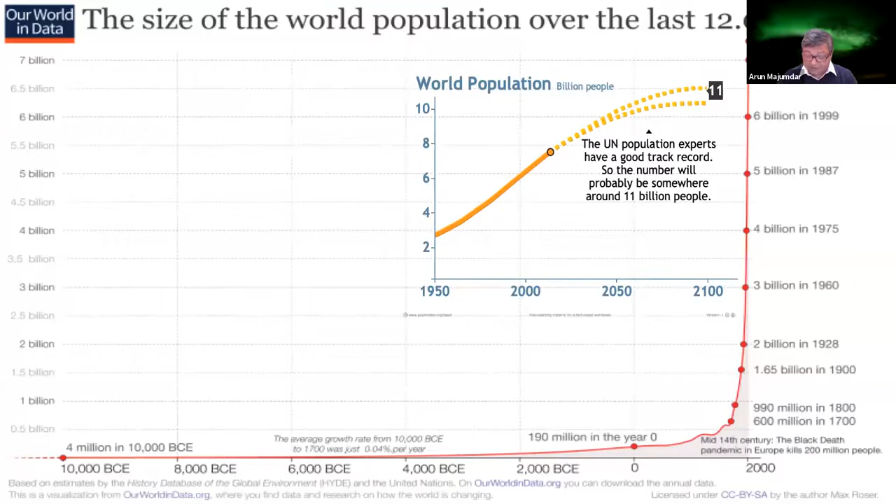And at the root of this is the use of energy. Without the energy, without the electricity that we are currently using, or the oil and gas that we have for transportation, we would not have this modern economy that we are trying to preserve at this point. And so energy is absolutely essential for economic growth and the quality of human life that we have developed, which has transformed over the last 200 years or so. People 200 years back could not have imagined the world we're living in today.

And that energy so far in history has been from fossil energy. And that today provides roughly 80% of the primary energy in the world. Renewables are a very small fraction right now. We have nuclear, hydroelectric as well, but it's mostly coal, oil, and gas. Now, the use of energy, of course, has led to this economic growth and a quality of life, but it has had other consequences as well that we are now grappling with.

Of course, we all know about global warming. This is some of the data on CO2 and the historic data on CO2. And I would say we are in unprecedented and uncharted territory right now. We are reaching almost 420 parts per million. And the global average temperature rise since the pre-industrial level is about 1 degree. Now I put a marker of 2 degrees, and that is the agreement that we had in Paris. We still have that agreement worldwide.

And the question is, why 2 degrees? That is an arbitrary number. But with 1 degree, we are now seeing the effects of climate change on the extremes of weather conditions that we are facing. And so we arbitrarily put a number saying that if you could only keep it below 2 degrees, it would be much better than 3 degrees, for example. So the question is, okay, so how long do we have? What does that really mean?

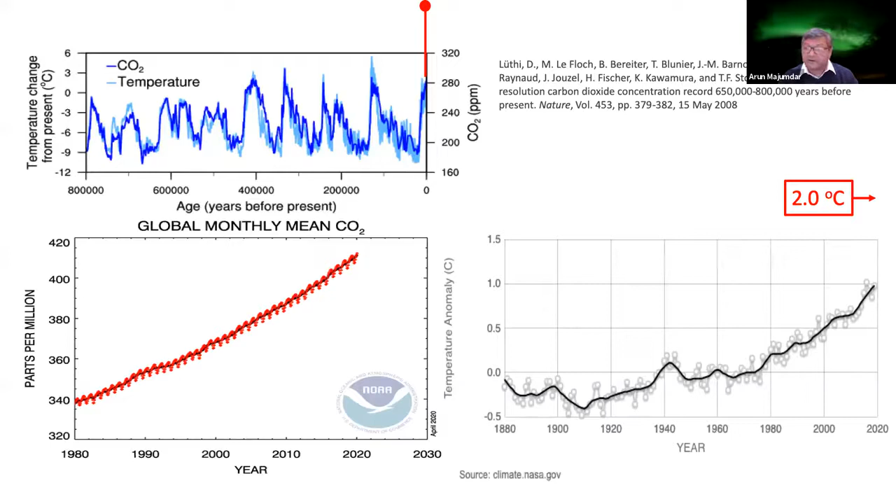So let me offer a quiz. Since I'm at a university, I offer quizzes. So here's the quiz for all of you. I'm going to throw some numbers at you, and I'd like you to think about what they mean, what are the units of the number, and what they really mean. And I'll give you the answer. There's no grading in this. The first number is 1.

And this is 1 degree Celsius. This is the global average temperature rise since the beginning of the Industrial Revolution. And with the 1 degree, we're now seeing, as I said, some of the extremes of weather conditions that we are facing around the world. The second number is 2. This is the 2 degrees Celsius according to the Paris Agreement that the world came to agree on.

The third number is 1,000. This is thankfully not 1,000 degrees Celsius, we're not talking about Venus. But if you are to keep the temperature below 2 degrees Celsius, we have headroom of a CO2 budget.

This is 1,000 gigatons of CO2, with roughly 70% probability of keeping it below 2 degrees. Just to give you a reference, if you add up the weight of all human beings on this earth, the 7.5 billion human beings, that's less than 1 gigaton. This is the headroom we have, because if you exceed 1,000 gigatons, we're going to likely exceed the 2 degrees as well.

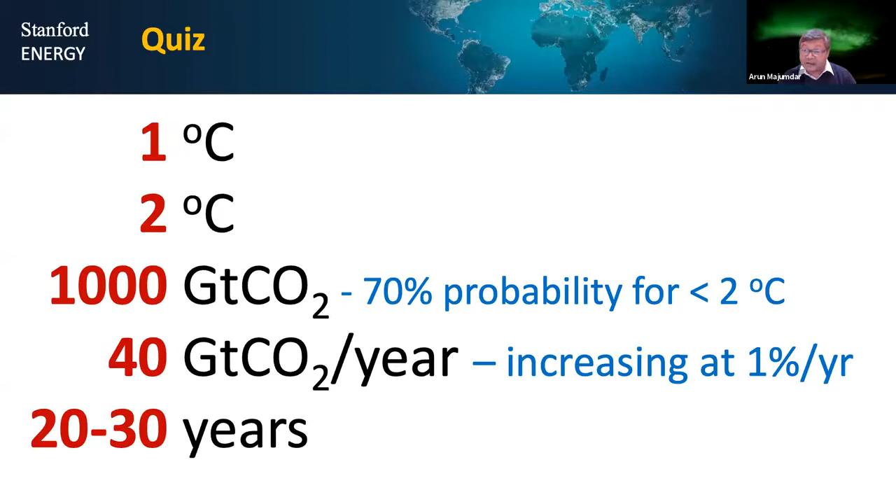Given the urgency and the magnitude and the scale of this problem, I think it is fair to say this is the defining dual challenge of the 21st century: providing access to affordable and secure energy for economic growth that we all need, but also simultaneously reducing greenhouse gas emissions. This is what we need to do, to turn the ship around to provide the energy but reduce the greenhouse gas emissions. This is a very hard problem.

Now, is there any good news in this? Are there some game changers that have happened? And indeed there are. So what are the game changers? I'm going to give you three of them. There are actually more than three, but let me offer three.

The first one is unprecedented in history: modern renewables at scale is the cheapest way to produce electricity. In fact, it's become cheaper than natural gas in North America and electricity from coal in many other countries. This is unprecedented in history, but it is intermittent, and the grid is not quite designed for that.

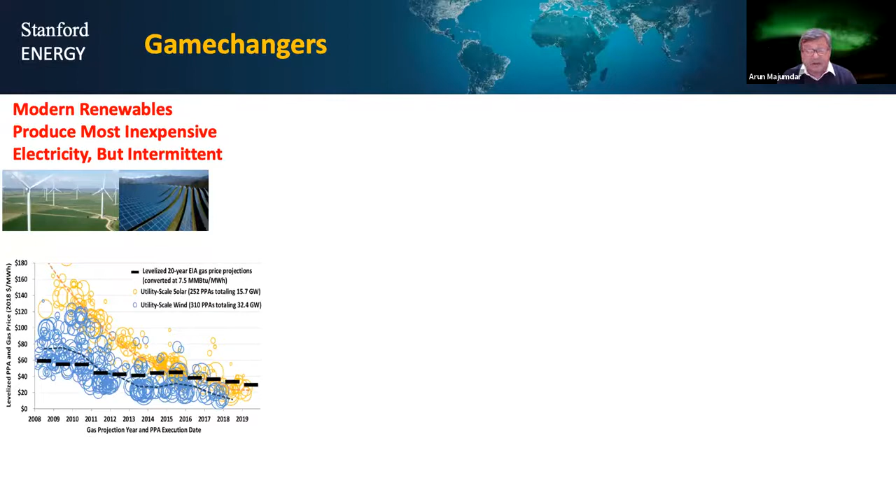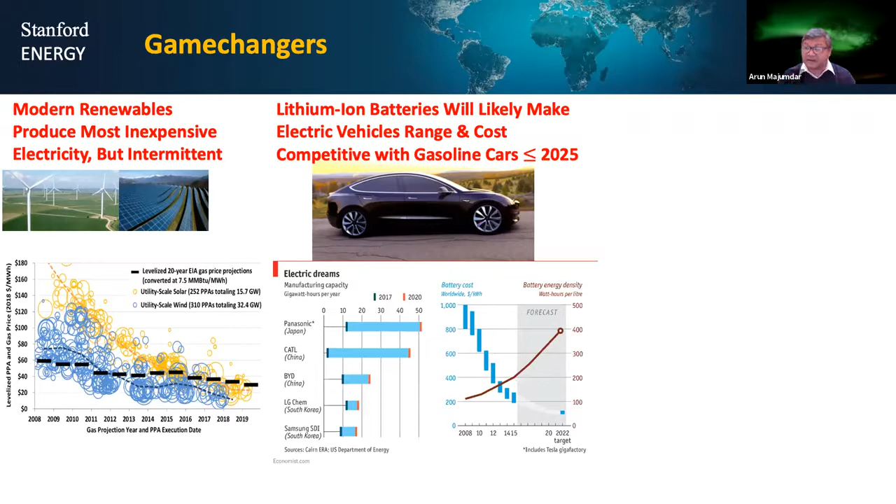The second game changer is lithium-ion batteries, and this is transforming the transportation sector. It is likely that the cost reduction in lithium-ion batteries will be such that it will make electric vehicles range and cost competitive with gasoline cars before 2025, maybe 2023. Give it another 20 years and we'll see a major adoption of electric vehicles. This is transformational, a once-in-a-century event that is happening and taking place.

The third is the unconventional gas revolution, which has provided inexpensive and abundant gas, replacing coal, especially in North America, and hopefully with some exports to other parts of the world as well. So this is the game changer, this is the good news. But you have to realize that this is a small fraction, the renewables are still a small fraction, but it's growing very fast.

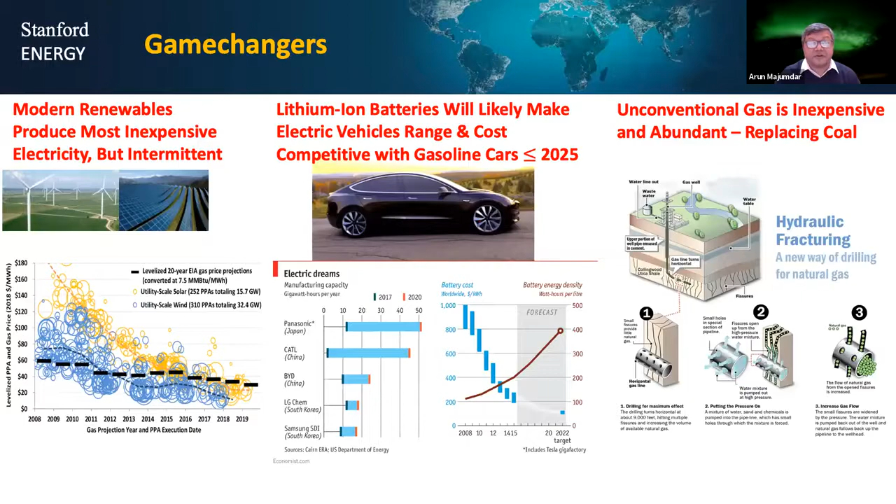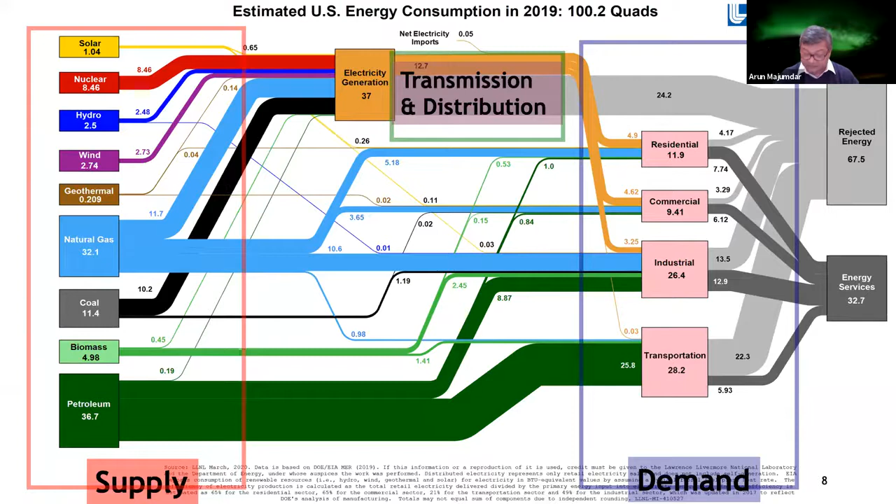And what we find, with all this growth taking place in renewables, which is really positive, is that if you do the accounting, about 90% of the current energy budget centers around heat: the conversion of heat, transmission, storage, and use.

So given the challenges of addressing energy and climate simultaneously, and given the predominance of heat energy, it is hard to think of addressing the dual challenge without addressing heat. And so this talk is really to focus on that one, and we can come back to other subjects later on.

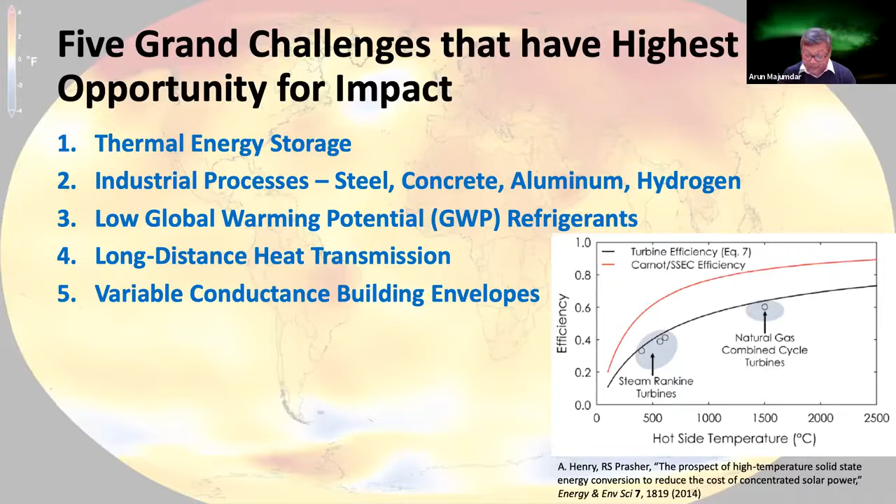So let me start with thermal energy storage. Given the renewables penetration onto the grid, it was never designed for fluctuating, intermittent renewables. We're already seeing the effects of that today.

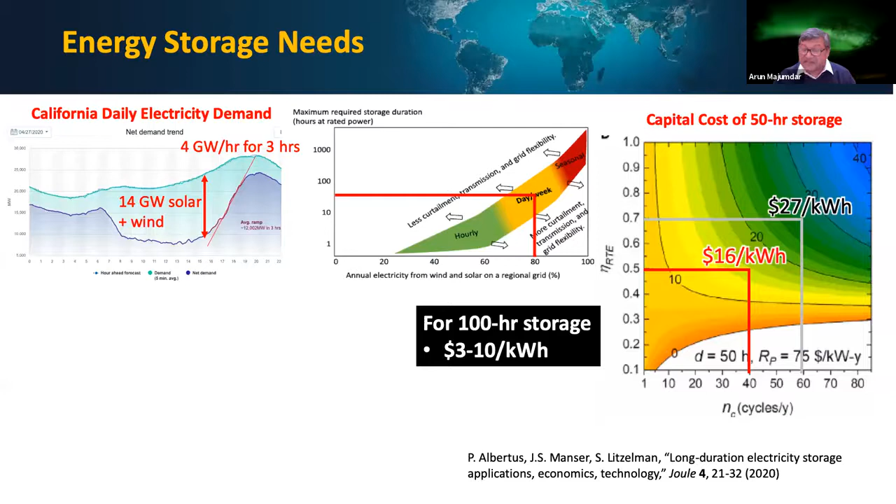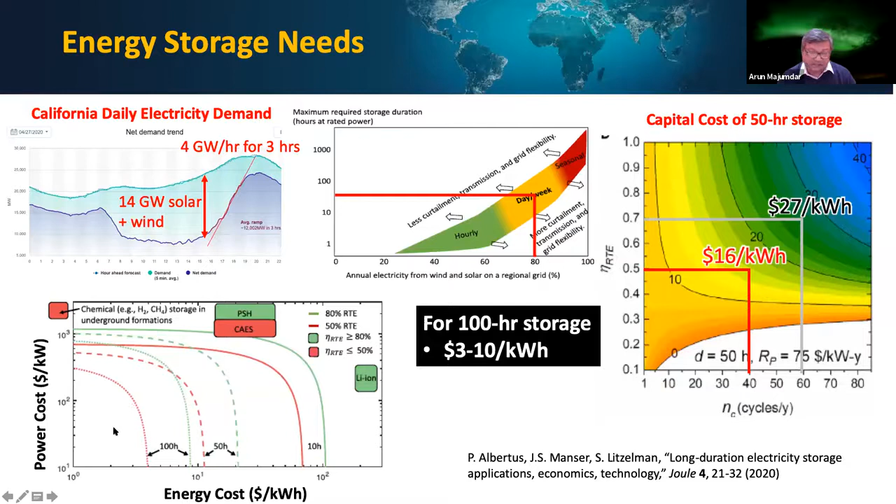And by the way, that's what we do on Stanford campus. These tanks of water that you see are for thermal storage. So this is already being used. But you could potentially go to very high temperatures, and once you go to very high temperatures, you've got a lot of exergy. You could use it for direct heat utilization, or you could run it through an engine to actually provide power.

Now, one may think that if your power is generated from thermal sources, then you have a big Carnot penalty in both ways. That is true. But if you generate your power from solar and wind, you don't have the Carnot effect on the generation side. So even though the round trip efficiency of this may be 50 to 60%, the cost could be much lower. So there are two technical elements out here.

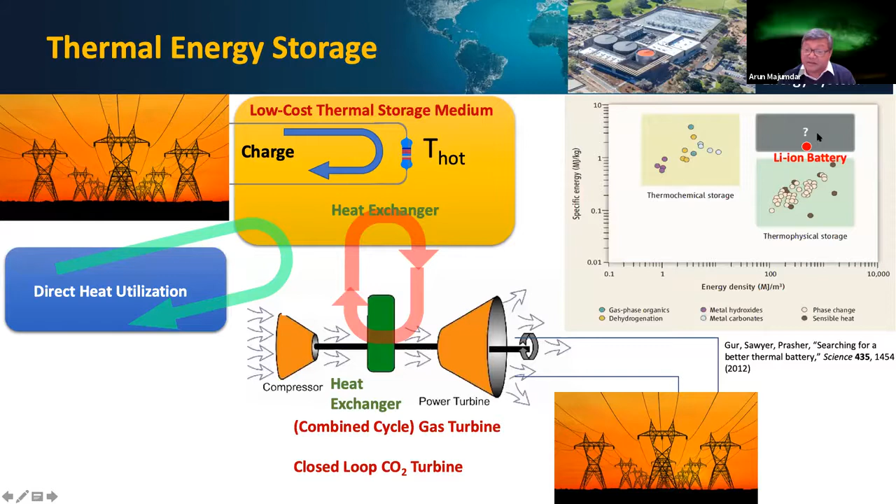And incidentally, lithium-ion battery energy density is somewhere over here, and we don't have a storage medium out here. It turns out that this is very important. We need R&D to get there.

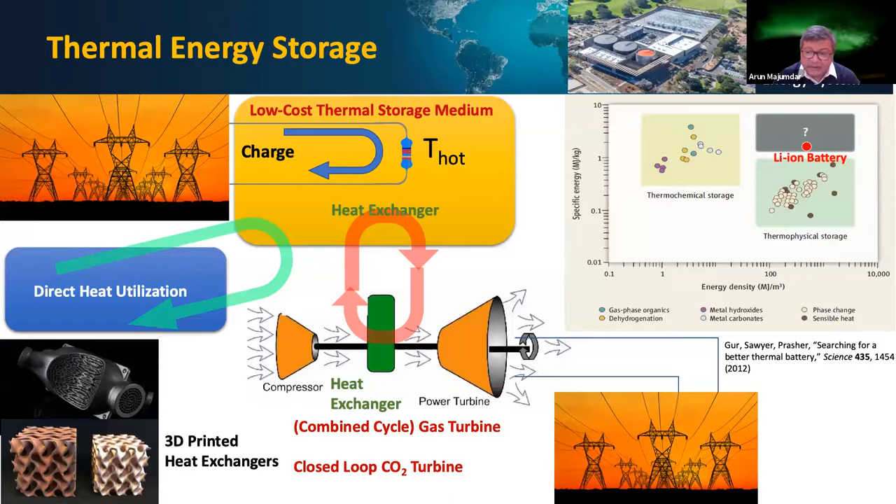The question is, is this cost effective? So I'm going back to that same paper and the ARPA-E DAYS program, which I find fascinating. This happened after I left ARPA-E.

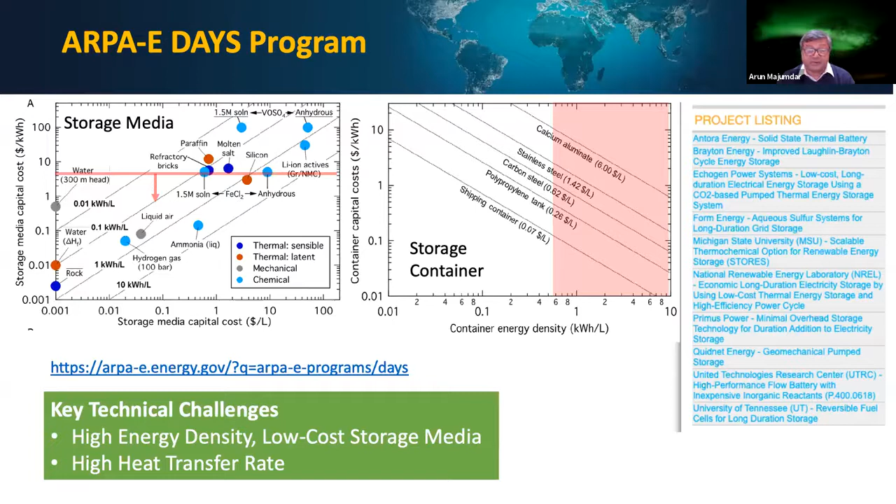But this is just to highlight the thermal side of it. We cannot ignore that, and that ought to provide an option for thermal storage, for storage in general, long duration storage. A quick note about industrial processes.

Cement manufacturing produces anywhere from 5 to 10% of CO2 emissions, and there are two sources for it. Calcium carbonate, when you heat it, produces CO2, and that's a pure stream of CO2 that comes out this way. And the energy used to raise the temperature to around 1400 degrees Celsius comes either from methane or coal. That also produces CO2, but it's mixed with nitrogen because we use air as the oxidizer, so that requires carbon capture.

There's a lot of work going on trying to reduce these greenhouse gas emissions, because with a $40 or $50 a ton CO2 price, this can be quite expensive for the cement industry, so they need innovations. You could do electrical heating, or you could go hydrogen. I'll come to hydrogen in a minute, it turns out to be very important.

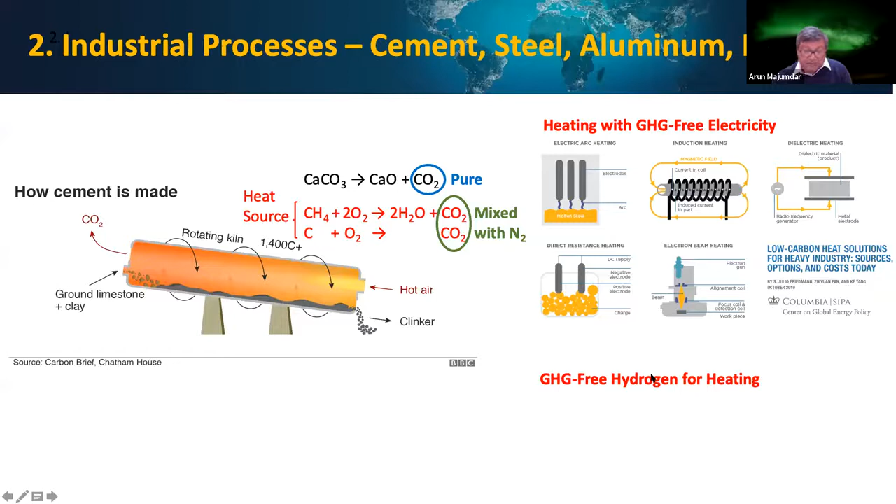You could look at steel. If you look at the blast furnace in steel manufacturing, you have ore, coke, and limestone fed in, and you have many sources of CO2 and CO coming out, requiring CO2 separation and capture. Now, there are some innovations going on trying to eliminate the CO2 part.

The CO2 comes because you use carbon, and you use the thermodynamic driving force of carbon as a reducing agent to reduce iron oxide to pure iron, making steel. But the question is, are there other reducing agents? Sure enough, there are. One is just electrons, in an electrochemical system, an innovation coming from Don Sadoway's lab at MIT using electrochemistry to go from iron oxide to iron.

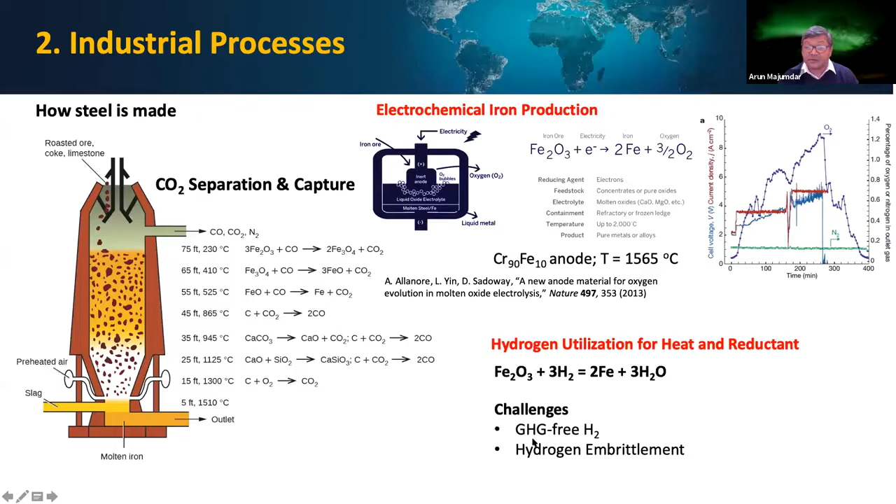Or you could use hydrogen as a reducing agent to make iron, but that has other issues like hydrogen embrittlement. Nevertheless, hydrogen could be a very important element as part of our future energy system. But that hydrogen has to be greenhouse gas emissions free, at gigaton scale, and it has to be less than $2 a kilogram, otherwise it's not going to make it. And it has to be at a scale where individual plants are relevant.

That's 20 to about 200 tons per day of hydrogen plants. We can go to distributed scale as well, as long as it's cost effective, but you also have to have large scale plants. Now, a lot of people think hydrogen is for transportation. Indeed, for long haul trucking we'll see hydrogen use, but the use of hydrogen for industrial processes and for heating is a very important aspect.

So how is hydrogen made today? It's made from fossil fuel, either from methane via steam methane reforming, or coal gasification, and that hydrogen has CO2 associated with it. If you add the cost of CO2 capture, you get about roughly $2 a kilogram. So any other technique has to compete with that $2 a kilogram. Today we produce about 70 million tons per year of hydrogen, mostly for ammonia, for fertilizer, and for petrochemical cracking, etc. So the question is, can one compete with this?

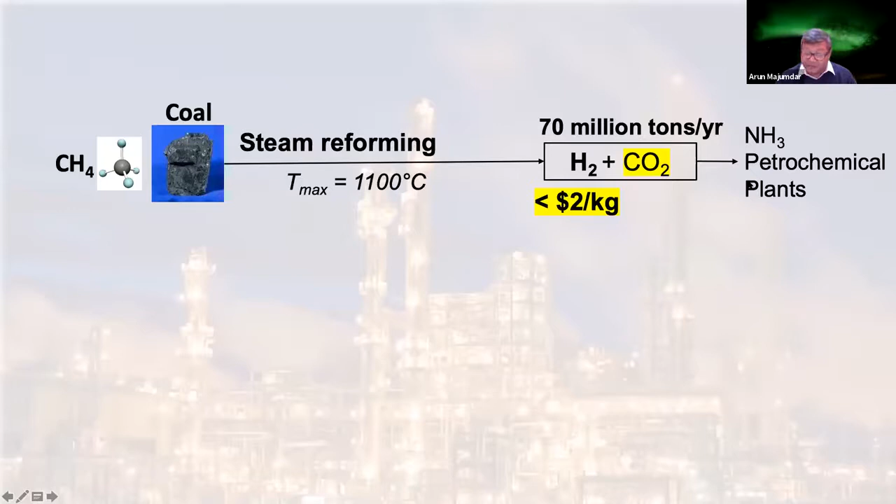Is the R&D going that way? And indeed there is. You could produce hydrogen from water splitting, using carbon-free electricity at less than $30 a megawatt hour, maybe $15 a megawatt hour, through electrolysis, which is where the predominant R&D is going.

Today it's at about $3 to $5 a kilogram, as opposed to $2, and the capex has to be reduced to make sure this goes below $2 a kilogram, and that's where the R&D is going.

But we should not forget that methane has a lot of hydrogen. ARPA-E has a program on thermocatalysis of methane, and this is still in the R&D stage. Hydrogen from methane has been used for a long time, for making carbon black. But to produce hydrogen and high-value graphitic carbon is still an R&D problem. ARPA-E has now funded this, and we have a program in my lab on this as well. This is a very important new direction that I think is worth exploring.

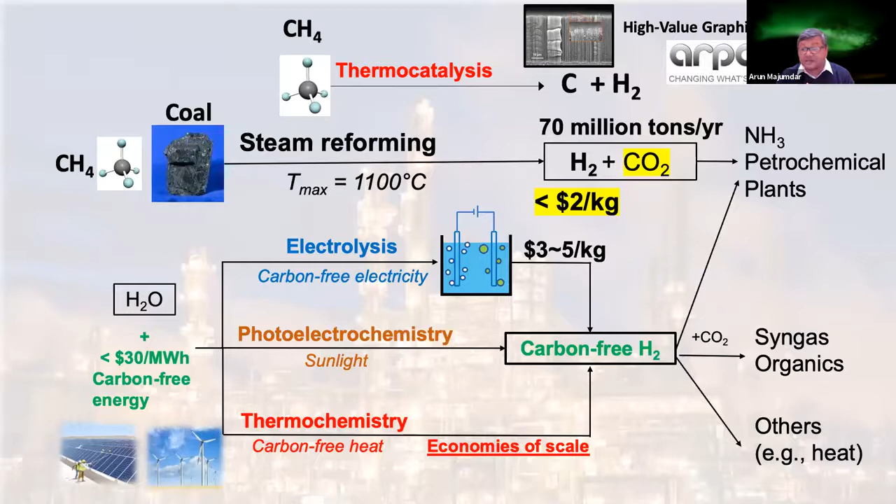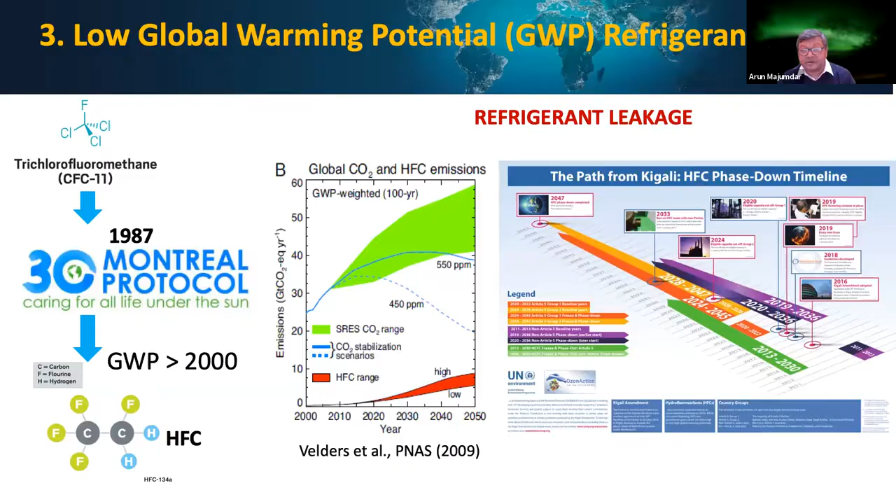After the Paris Agreement in 2015, in 2016 came the Kigali Amendment to the Montreal Protocol to phase out HFC. But the challenge is that while there's a lot of R&D and other approaches like propane, et cetera, or CO2 as a refrigerant, we don't have a drop-in replacement.

It would be terrific to focus our R&D to find a drop-in replacement for HFCs, with a global warming potential hopefully less than 1, which are non-flammable, non-toxic, and affordable. Because with the rise of refrigeration and cooling in emerging economies, this could be a major challenge. So this is an R&D area that we wanted to highlight.

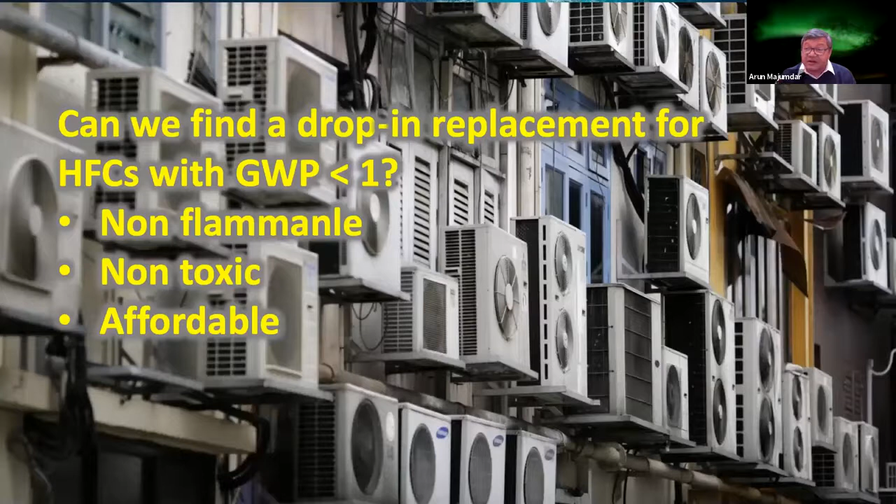Moving forward, number 4: long distance heat transmission with low exergy losses, with low losses. We don't have an equivalent of the grid for heat. We cannot do long distance transmission. And the question is, could we do that? Are there other sectors that have already shown that?

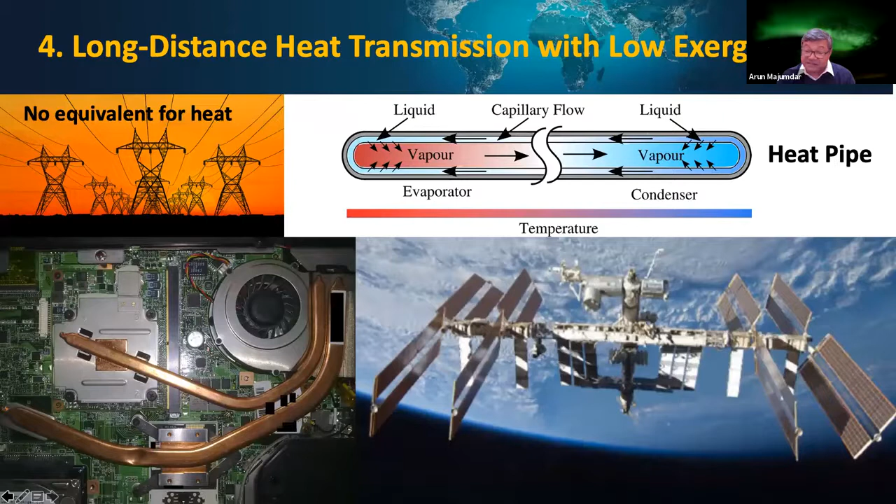Indeed they have. We use small heat pipes. In fact, if you open up your laptop computer, there are heat pipes to move heat from one place to the other at very low delta T's. And those heat pipes actually came from the space industry. So now this is available, but the challenge is the following: these are typically less than a kilowatt in capacity, they operate around 100 degrees Celsius temperature range, and they have an effective thermal conductivity on the order of 10,000 watts per meter Kelvin, many times that of copper, and about 3 times that of diamond at its peak.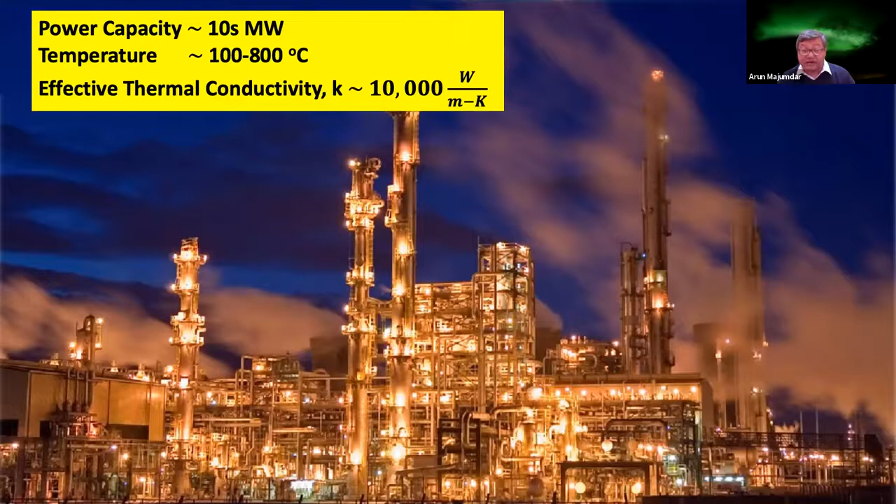So this requires R&D. Maybe the way to think about it, here's a proposal for a dissociative chemical reaction of AB going to A plus B. This is an endothermic reaction, and the temperature could be controlled by the enthalpy and the entropy. You could move these two streams, A and B, elsewhere, and maybe have a catalytic reaction to recombine them and have an exothermic reaction. This becomes a moving enthalpy process for moving long distance, moving these fluids A and B.

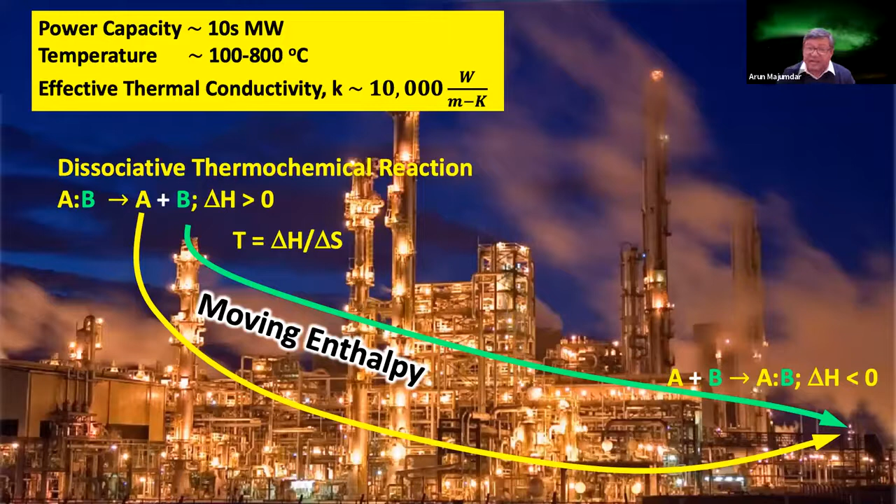This has not been thought about much, but as chemists would know, there's something called Diels-Alder chemistry, where you could do these associative and dissociative reactions, and that got a set of Nobel Prizes in the past. Or you could do it with metal oxide or calcium carbonate directly. But anyway, this is an area that requires thinking, because if you could do this, you could make these plants much more efficient. All these petrochemical plants were developed to reduce cost and make a product.

They were not designed to reduce CO2. So if you want to use these to reduce CO2 emissions as well, you need other ways, and one of the ways to do so is to move heat, because 80% of the energy used in these plants is heat. So managing heat over long distances is very important.

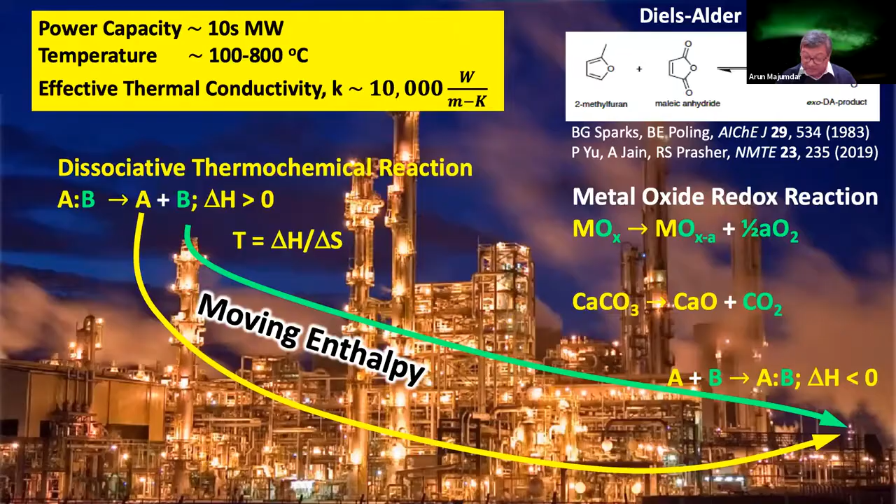Finally, let me come to buildings. Buildings use a lot of our energy. In fact, 75% of the electricity used in the United States goes into buildings, and they contribute about 30 to 40% of the CO2 emissions.

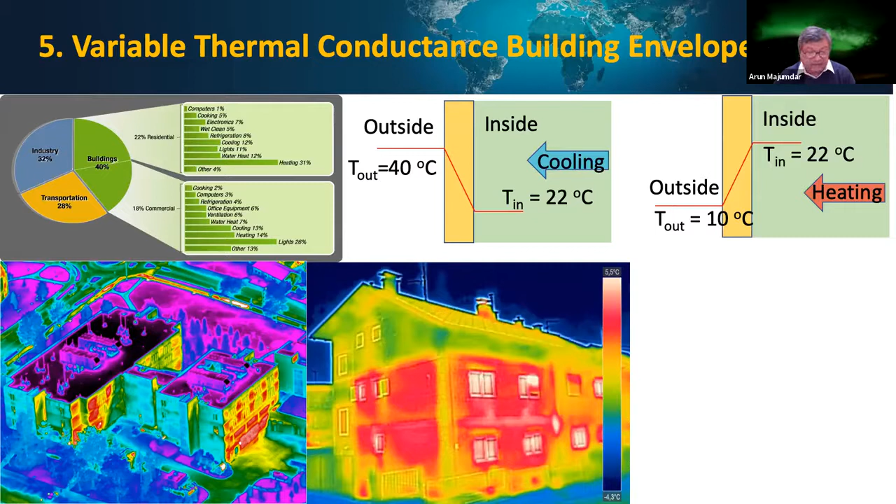Buildings are exchanging energy with the environment all the time. If you look at these infrared images, it tells you which part is hot, which part is cold. Wouldn't it be nice to have satellite imagery, high resolution satellite imagery, not just in the visible range like Google provides, but in the thermal range with high spatial resolution, which we don't have today, and thermal street view. We have street view today, but we don't have thermal street view. It would be terrific to have this and apply machine learning to identify the hotspots.

In my lab, in collaboration with Ram Rajagopal, my colleague at Stanford, we have done this for the visible part of the spectrum. We created an algorithm called Deep Solar to identify solar panels from the visible part of the spectrum, and now we have the largest database of the GPS location and size of every solar panel in the United States. We could do the same for the thermal side if only we could have the thermal imagery.

As you can see, the walls we use in our buildings are passive. We try to reduce the thermal conductance, but sometimes we want to use the outside environment to bring heat in, and sometimes we want to block it and reduce the conductance. Wouldn't it be nice to be able to control the thermal conductance? If you could do that, some studies have shown we could save up to 10 to 40% of greenhouse gas emissions.

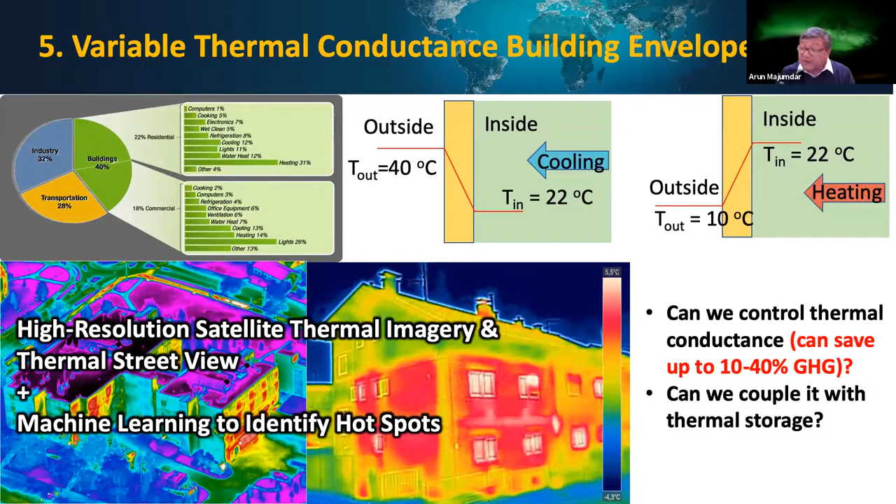And can we couple it to thermal storage in ways like this? If you could only have thermal switches. We don't have thermal switches today, and there's a lot of research going into using thermal switches in a tunable way, leveraging storage to time shift and use the environment to your benefit.

One of the things I think Professor Jiang from Tsinghua University is going to talk about is heating and cooling in buildings. This is a building on the East Coast of the United States where it gets very hot and humid in the summer and very cold in the winter.

Let me show you something striking. In July and August, which is very hot and humid on the East Coast, you have cooling that is expected, but you also have heating going on. And in the winter, in January and February, you expect heating, which we certainly have, but you also have cooling going on at the same time when you don't need it. So many of the buildings we see around the world are fighting themselves internally with heating and cooling simultaneously, dissipating energy. So it's very, very important.

I'm sure Jiang is going to take a systems view of building heating and cooling, whether centralized or decentralized. I'm really glad he's on this panel in the future.

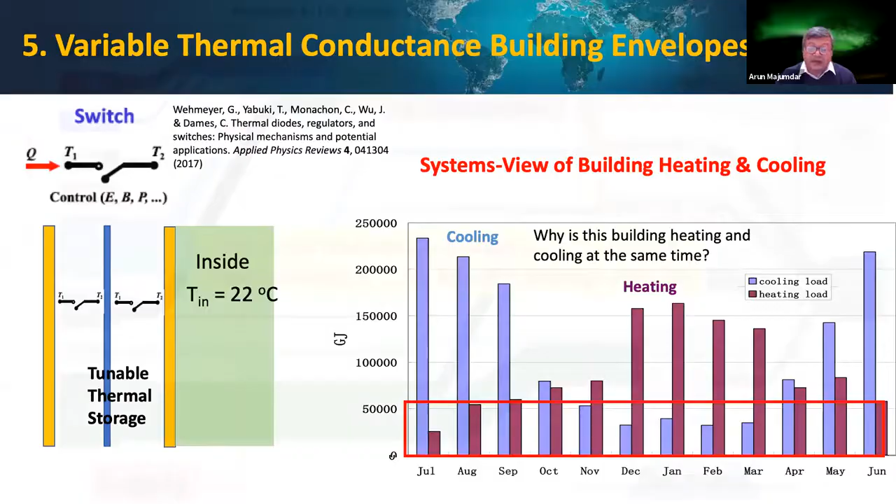So let me end with the following. We talked about the fact that 90% of the current budget centers around heat, so it's very important to address it.

We have identified 5 of these challenges. Now we can debate about this, and we scientists and engineers like to debate - that's good, that's very important. You can pick 1 or 2 of these, you can add a 6th one, a 7th one, if you think it's an important challenge, but you've got to justify it. This is our proposal to you to start the dialogue. It's very important to start the dialogue and see what comes out, because it's not about the individual ideas, but the collective, where we are going with this.

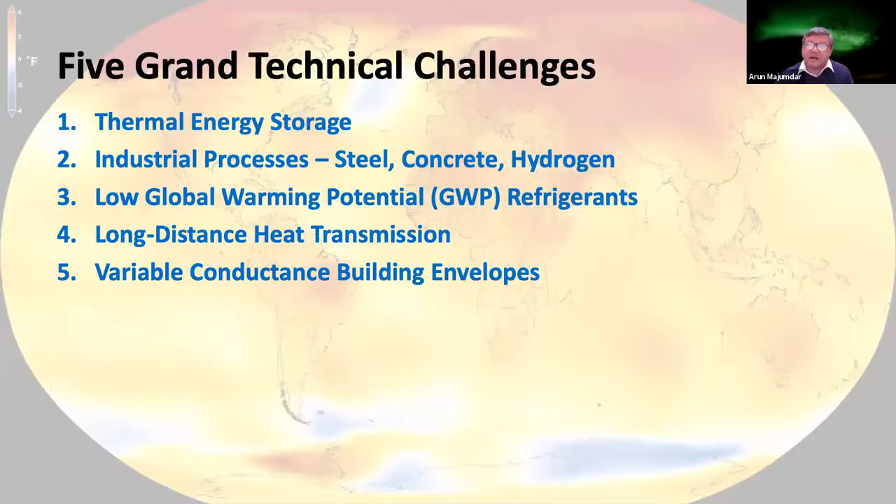But let me also take this moment to take a shot at what is the new normal, and lessons from history. As we all know, we are in unprecedented times. This is a moment in history that will have an effect not just in the next few years, but for decades and generations to come. Are there moments in history where we have faced this?

I'm reminded of my discussions with my colleague on Stanford campus, a very distinguished gentleman, former Secretary of State George Shultz. Secretary Shultz is going to be 100 years old this year, he's 99 now. He fought as a Marine in World War II, in the Pacific, and he has a perspective of history that is absolutely unique. I was talking to him last week, and he keeps reminding us almost on a monthly basis: what were the lessons learned from World War II?

And what were the mistakes people made after World War I? And one of the things people realized after World War II is that we're all in this together. This is one humanity. And it's a pretty crappy place after World War II. Millions have died. The economy is in shambles. And the question is, what is the future we want to define?